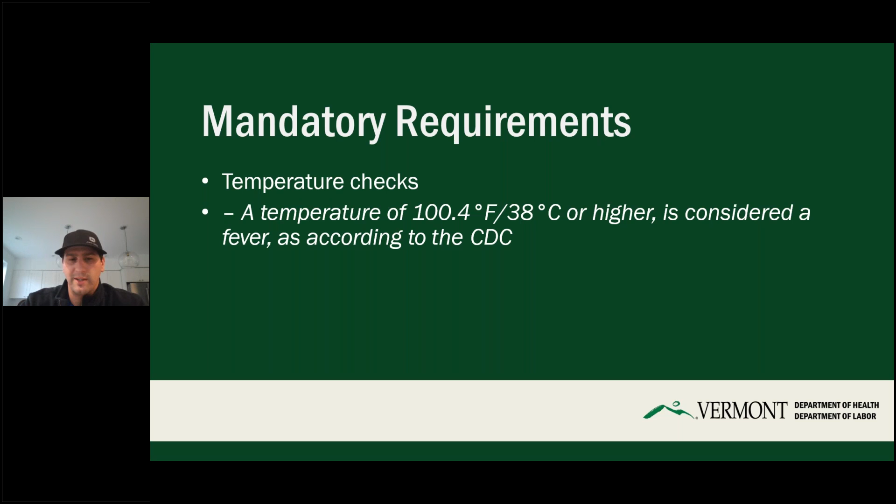Anything higher is considered a fever according to the CDC, so those are the guidelines we're following. This is our body temperature monitoring policy: we're asking all employees to do a daily self-check. Each employee shall perform a daily temperature check prior to reporting to work. If the body temperature is at or above 100.4 degrees Fahrenheit, the employee shall report their condition to the supervisor and please stay home.

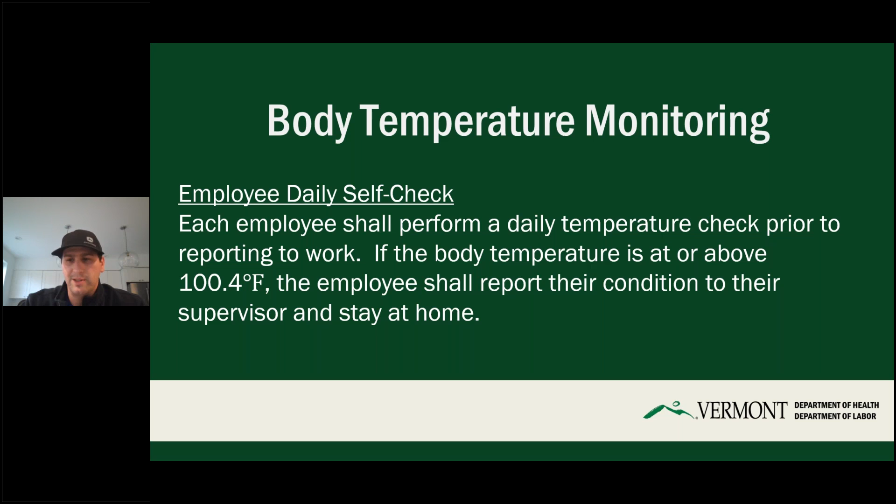Following through, we're going to be doing employer-performed body temperature scans, utilizing a touch-free digital infrared body temperature device. We're going to follow manufacturer's instructions, and the device will be wiped with disinfectant between each use.

It will be performed by Alberta and myself during our routine visits. We're going to try to hit the shop, tool crib, and office employees as randomized as best we can, at least every 7 days. Both the testers and the individuals being tested will be wearing facial coverings during this process because we'll be breaching social distancing.

The testing personnel shall provide an immediate pass or fail, so we'll let you know right away what the temperature scan says. We will also report the pass-fail results on our site report form that we conduct during our visits. No names will be listed or recorded on our reporting form, so that's kind of important that everybody knows.

If there are any questions regarding this new procedure that we'll be doing out in the field and throughout the offices, please contact myself. I'll be the first one doing this over the next couple of weeks while we wait for the other temperature thermometer to show up. It is being back ordered, but hopefully it'll be here in the next couple of days.

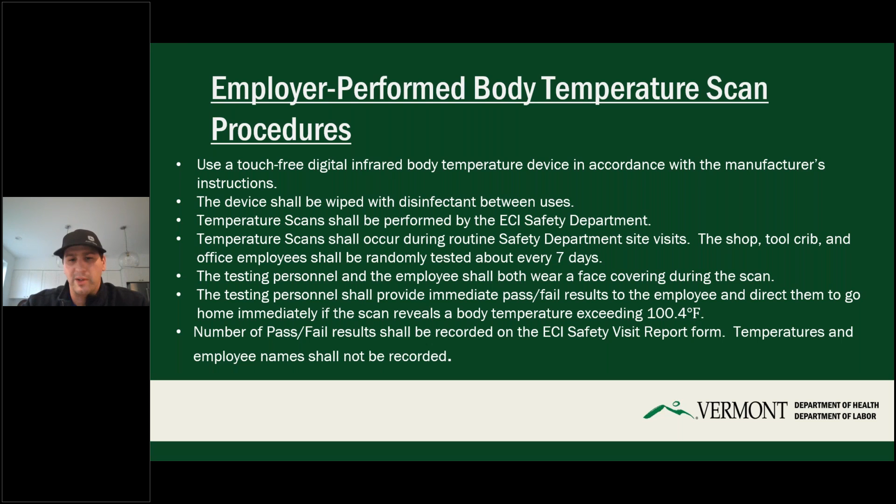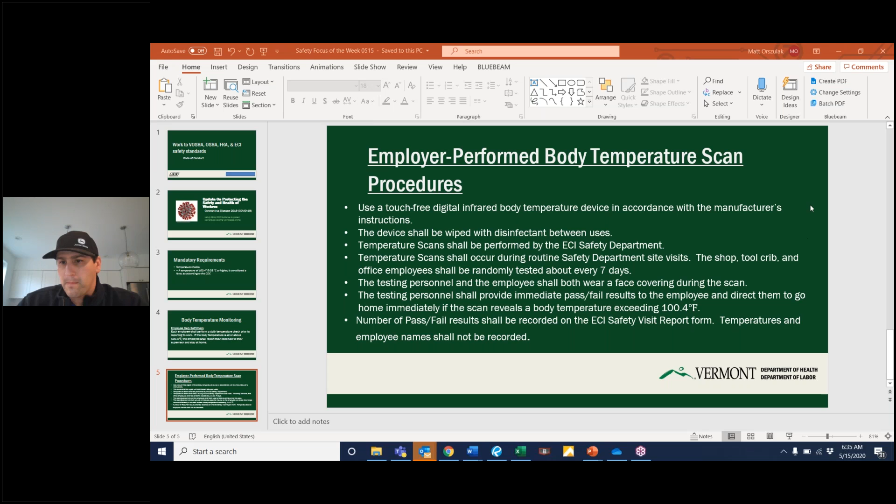Okay, thanks, Matt. I switched the screen. Show my screen. Does everybody see that? We do, Ken, thank you. Sounds good. All right, now I just see you, Matt. Let's try that again. There we go. You see it now? Yes, we do, Ken.

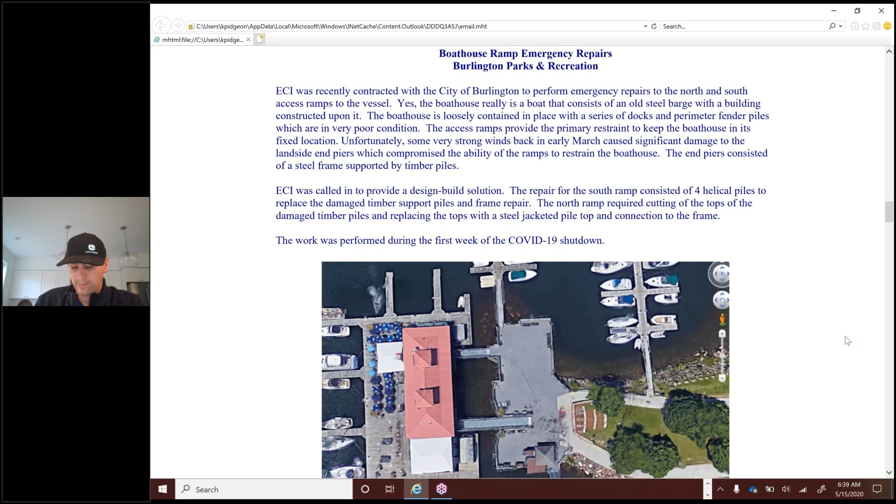So the wind pulled the vessel so hard that it broke some of the connections to the mainland side through these ramps. The end piers consist of a steel frame, some C channels supported on timber piles, with the bearing of these ramps or bridges effectively resting on the steel frame.

So we were called in to provide a design build solution. The repair of the south ramp consisted of 4 helical piles to replace the damaged support piles and frame repair. The north ramp required cutting the top of the damaged timber pile and replacing the tops with a steel jacketed section over the top of the timber, then a steel connection into the frame supporting the bridge. The work was performed during the first week of the COVID-19 shutdown.

Again, it was an emergency response. There was concern that it would really damage everything, or maybe launch that thing out free in the lake if it got real bad. So there's an aerial view from Google Earth.

Most people are familiar with it's the very end of College Street there, just over the railroad tracks past the Echo Center. That's the Ethan Allen ship at the bottom of the photo, and the boathouse has the red roof with the ramps. The short little ramps on the top and bottom of the photo are the ramps that were damaged, and the connection was at the right-hand side, or easterly land side, part of the bridge.

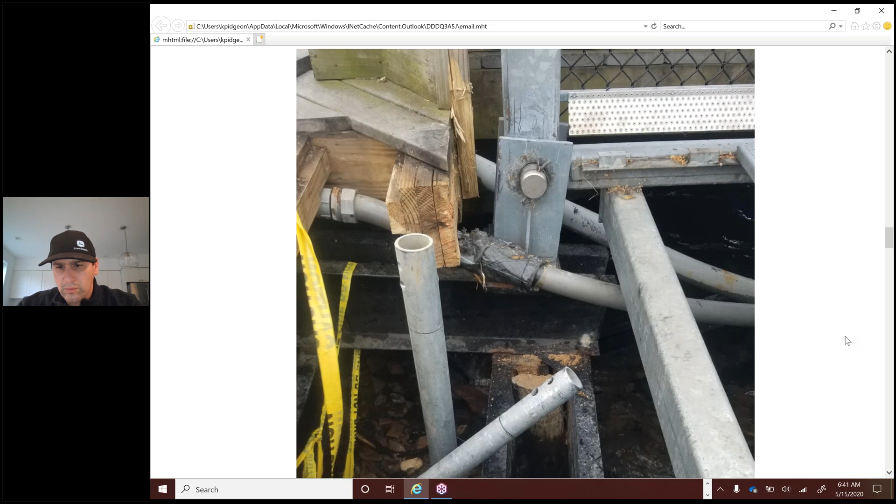So the force pulled pretty hard. You can see it just put a pulling force against the bridge, and the bearing there on the ramp, the bridge twisted and pulled that frame apart a little bit and torqued it, and also damaged the timber pile. You can see the top of the timber was sandwiched in between the steel frame, the C channels, and then we put those newer helicals in there. We have a battered one because some of the load component is a horizontal longitudinal load along the bridge to restrain the boat.

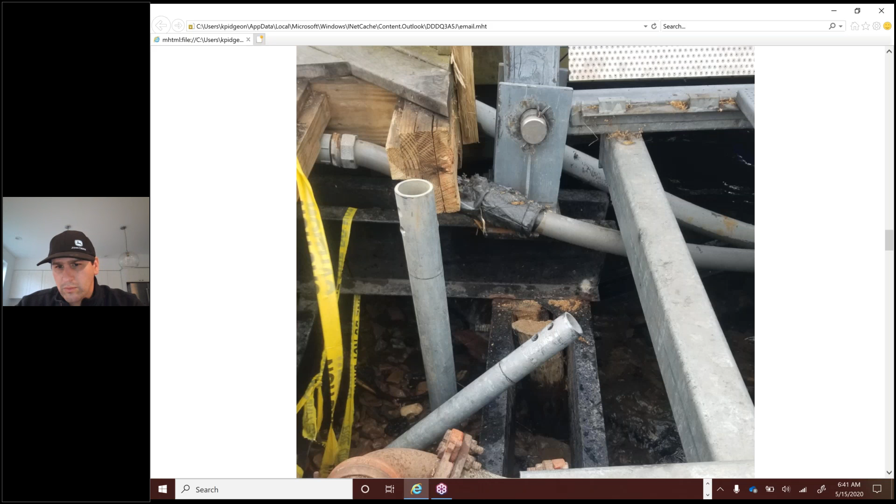Also, there was a bunch of utilities there. There was water and gas and electric and everything like that that had to get temporarily relocated while we did the work.

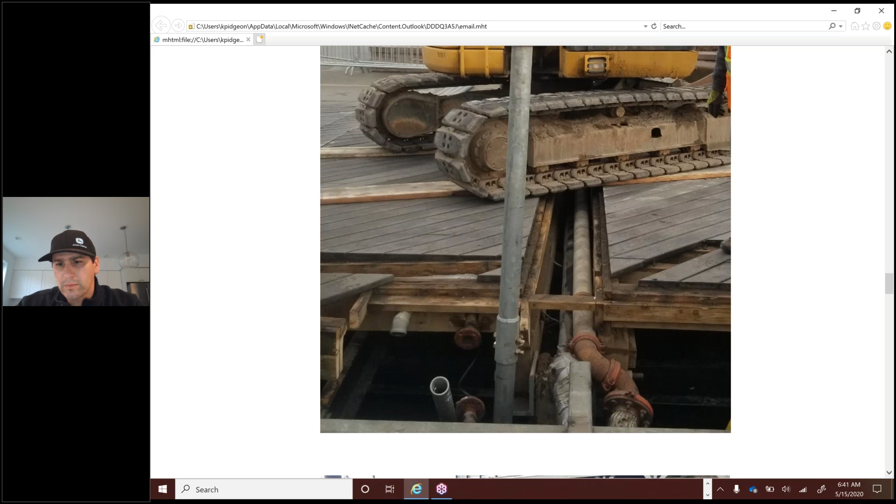And here we are doing some of the helical. It's a pretty tight area where there was enough room to get the helical within the frame between the sections of channel. And this was on the south bridge.

This is the north bridge. It was quite a bit cleaner and simpler because there was very little decking around it. And the piles are there in the center of the photo, underneath that electrical conduit, where it looks like an LB or something like that, just below where those other boards are attached to the pile.

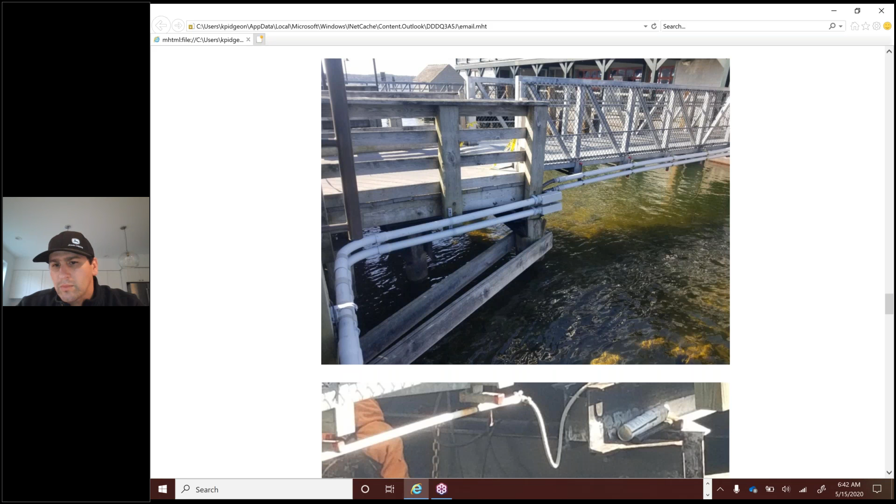So the timber part stuck up into the channels. You can see the dark areas of channels on each side of the timber. The timber was kind of narrowed down on the top of the pile to accept the timber pile connection to the channel framing. And then with this end here, this is the north end, it required some jacking of the framing to get it back lined up and graded on grade.

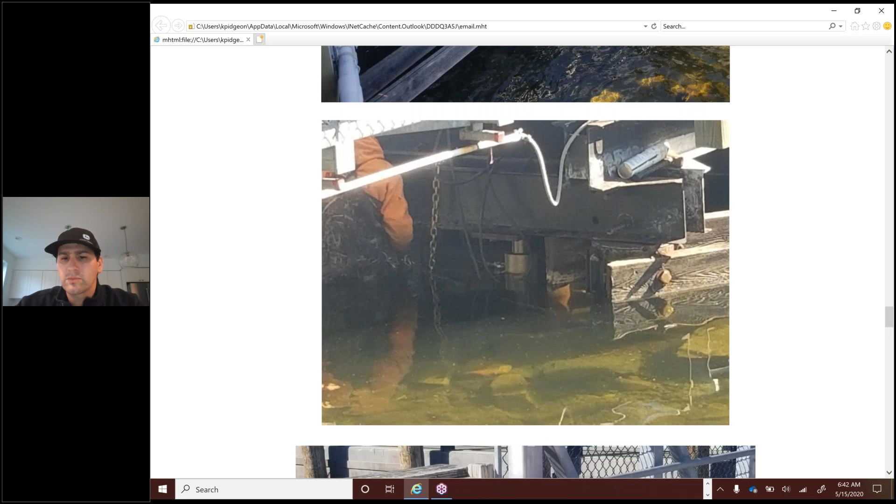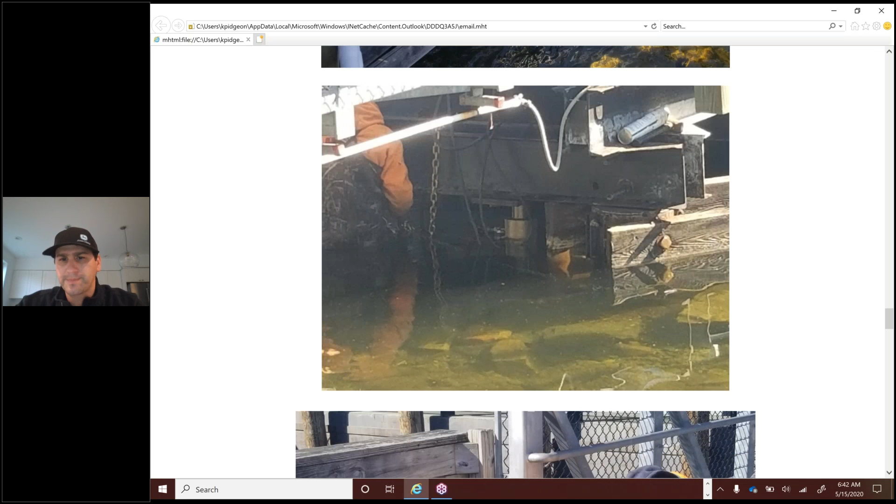And it was fairly shallow water there, almost waist high. That's Pat Wells bent over doing some fitting up. And then they put the jacks up there, and the jacks were pressurized from above. There's Chico looking down on it, just applying a little more pressure to raise the jacks up.

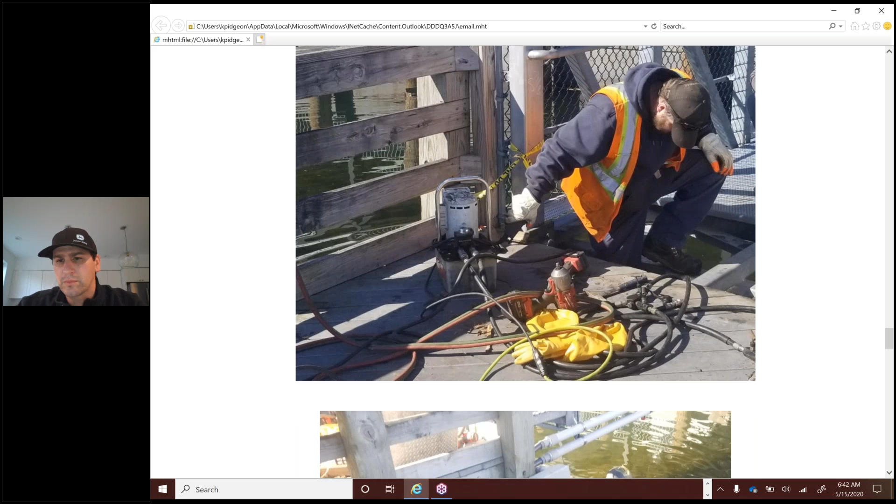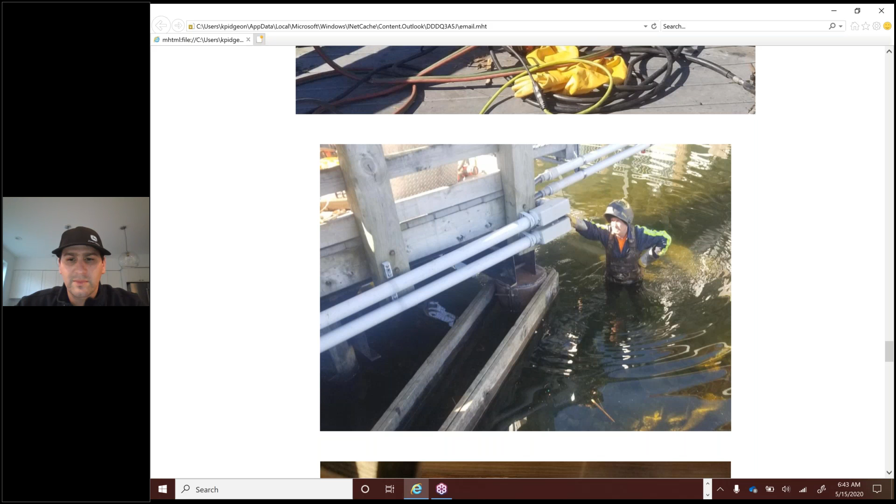And there's Pat with his proud little completed work there, with the cap on top of the timber pile, jacketed around the timber pile, and then connected to the steel framing above. And here's some of the idea - I think that's really on the south side - of how tight it was working underneath there for him.

Doing some welding of the steel framing there. Oh, for some reason I got a second picture there.

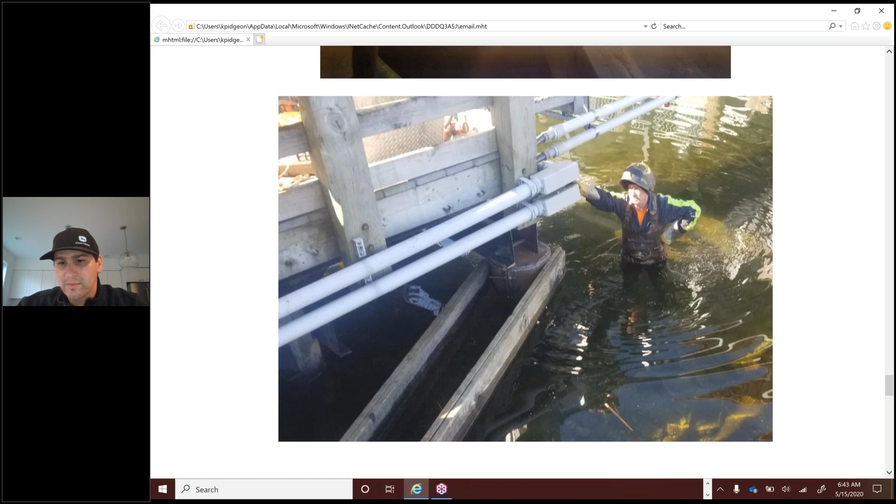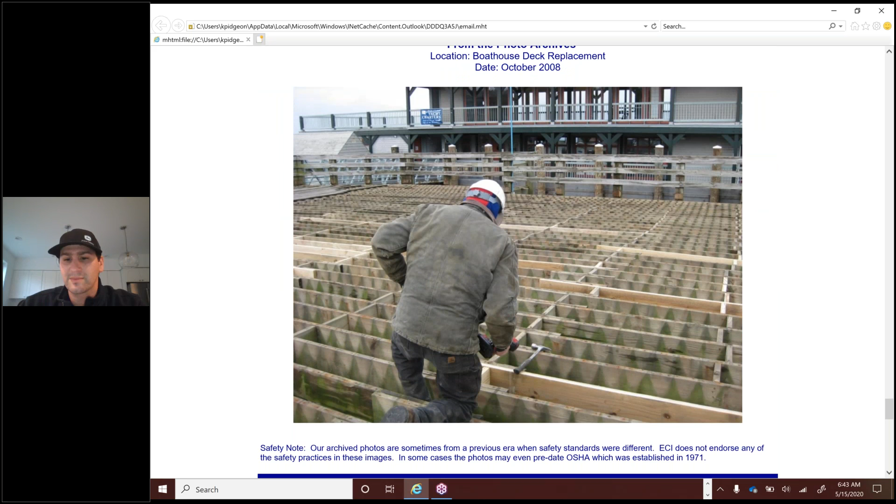But that was the repair. And as a photo archive, we happen to have a photo of when Mark Nash, back in 2008, was doing the deck replacement. All that boardwalk area in front of the boathouse is made of Trex. We installed the Trex decking boards back then, and the south bridge is kind of over Mark's hard hat just to the left there. It's a truss frame, aluminum truss frame.